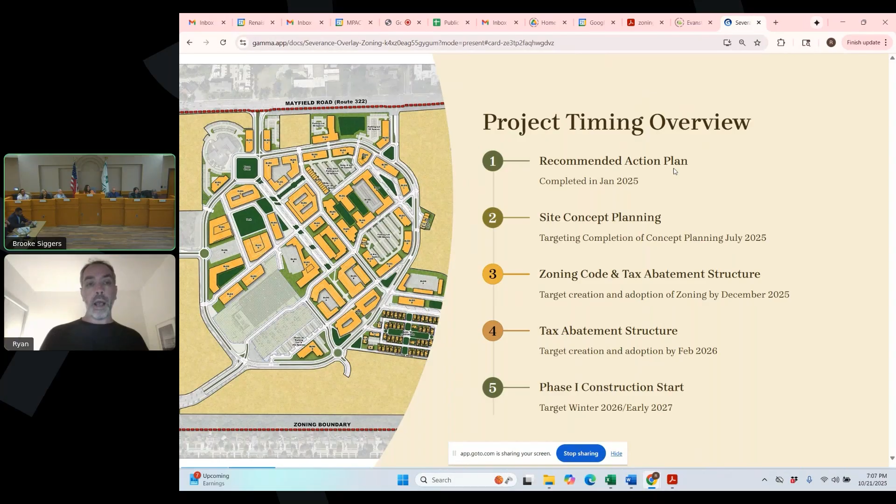So I'm going to roll through where we are. Again, the area concept plan, some of you may or may not have seen this. It hasn't changed dramatically since I presented it to the city council. This is a large scale mixed use walkable development. This concept plan was strategically developed by us, but I want to be 100% clear: we're not saying this is exactly what's going to be built.

The zoning code we're recommending for the city to adopt for this site is an optional overlay form-based zoning code. It will sit on top of the S1 zoning that exists on this site and will not be an obligation for any property owners to use. They could stick with their S1 zoning, or they can opt into this new code. It's optional — really important for people to understand. We're not forcing the zoning on every property within this red boundary.

That red boundary is bordered on the north side by Mayfield, on the west by Taylor, on the south by the back lot lines with some buffer to the single family home neighborhoods, and same on the east. It'll have a buffer area to the single family home neighborhood on the eastern side. That will be the overall zoning boundary.

Again, this will be an optional zoning that people can opt into or stick with their existing S1 zoning. Ultimately, this form-based zoning code will allow people to develop certain uses under certain zoning and form regulations — different heights, different standards for frontage requirements, whether they have ground floor commercial space or not. That will be regulated on a block by block basis, and I'll get into that as we go through this presentation.

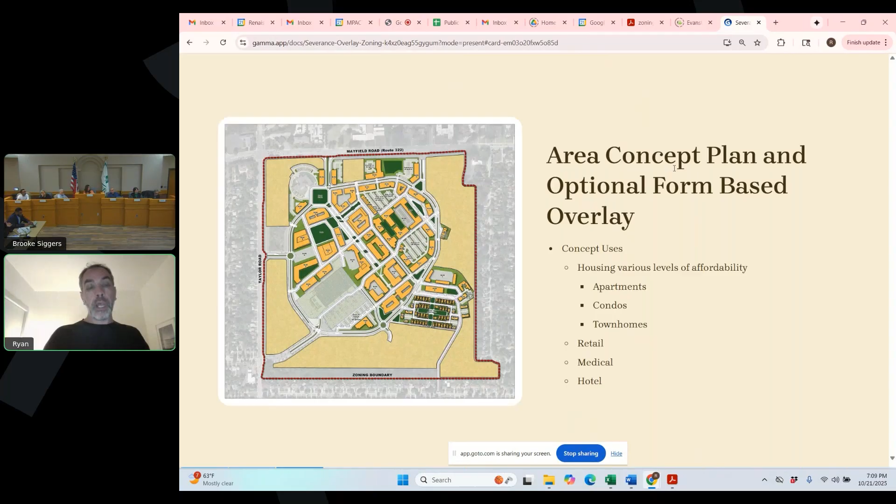Just because I have the buildings set out the way they are right now — we imagine phase 1A to be this right-hand side of your screen, the corner up near the existing condo building adjacent to City Hall. We imagine that being the first mover area of this project. But because we've designed the concept plan as building A, B, C, D, E, how they're laid out, we're not saying that's exactly what's going to be built.

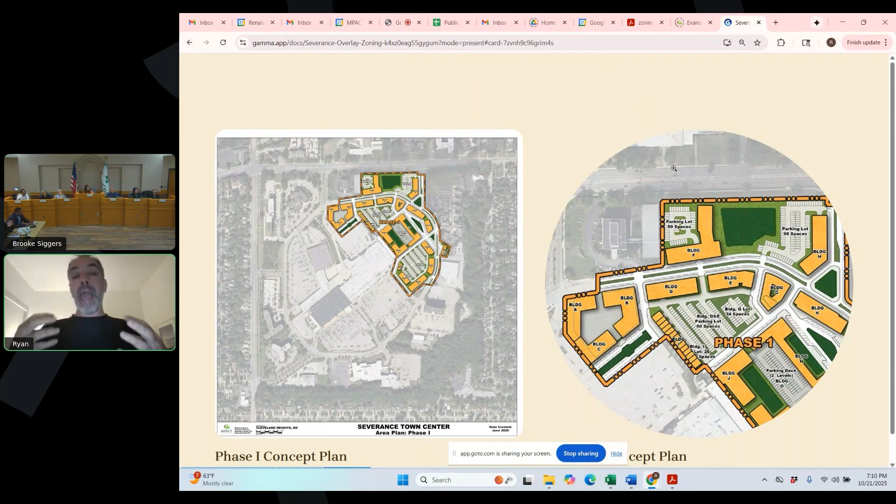Ultimately, the building will go through a site plan approval process and an architectural design process, but the rules around each block need to be followed as the form-based code calls for. Building A, B, and C might become a donut building instead of 3 separate buildings, or it might become 2 bar buildings along the 2 streets.

So the concept plan is not directly required, obviously, because I can't guarantee how things will be built, but the rules around the urbanity and walkability we're designing into the form-based code will force buildings to be set up at the street with parking hidden behind, certain heights allowed, certain typologies, and a certain amount of open space, civic space, and parking required. We'll dive into those types of things.

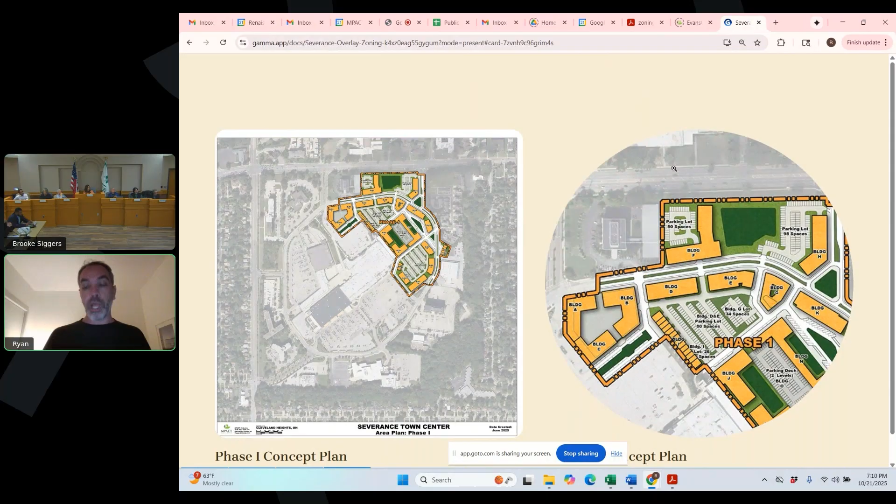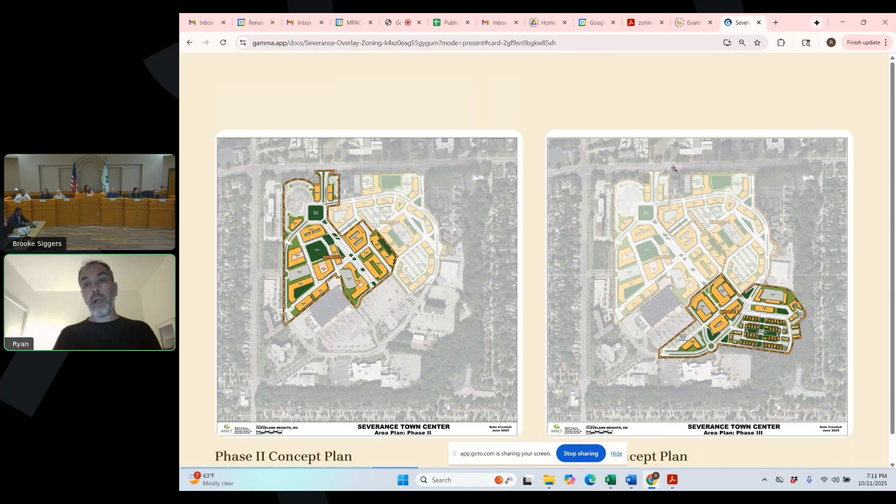This concept plan is a driver for how we could see the site getting developed over time. Eventually we think we'll develop basically the entire east portion of the site from the north side to the south side where the Walmart movie theater box is, because that's the least occupied area of the mall and the most available for development from a parking lot vacancy perspective. Then we imagine moving back up towards City Hall for a second large phase of this project.

To be clear, phase one alone, as programmed in this concept plan, could be 7 to 10 years of development alone, because that in and of itself is 700 to 800 units in just that area. Remember, this is a very large site. What I was showing you in phase 1A is like half the size of Van Aken, just that little section, because this is a 50 plus acre site. So it is going to take a long time. This could be a 20 to 25 year build out, and it's definitely going to be a process.

But again, we see transitioning from a large phase one on the eastern corridor of the overall site to then tearing down most of the main mall areas, hopefully moving the Daves into a new facility, and then building this kind of boulevard type Main Street area that starts at City Hall. That would be the phase two area, and then we'd work our way towards the southeastern portion of the site for what we consider maybe a phase three area.

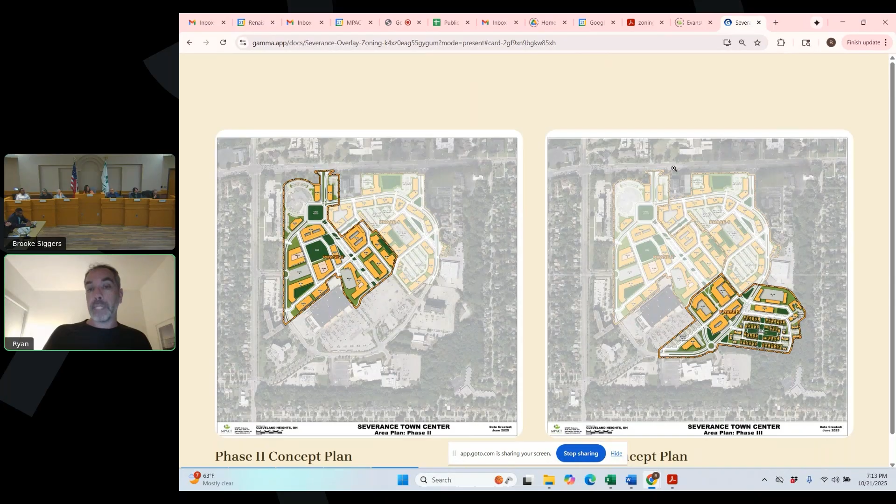You'll notice that Home Depot is kind of sitting out there all on its own because we don't control that parcel, and it's very unlikely that parcel changes over any near term. That said, the zoning overlay will sit on top of that Home Depot site. So should the value of this downtown become such that it makes sense financially for Home Depot to no longer be Home Depot, then the owner of that site has the opportunity to opt into the zoning as well.

I'm going to talk a little bit about form-based zoning, but we don't have enough time for me to get into the nitty-gritty. It is something that was built to oppose the traditional Euclidean zoning that we used for a very long time, and I'm sure Bob and some of the people on your commission could even explain it better than me. As opposed to having uses that are segregated into areas, here's a residential area, here's an industrial area, here's a commercial office area,

form-based zoning looks at putting those uses together and regulating the form of the buildings and the public space around them. So how do we create great place? Through our form-based zoning codes, which we've done very successfully in multiple communities, we create great place by regulating how the buildings address the curb and the public space, what has to be civic space, how high the building can go, what the step backs are over a certain height, and where the parking has to be hidden. Those are all the things we regulate in the form-based zoning code.

How much ground floor glazing do you have to have versus just having a blank wall? How much of that ground floor glazing has to actually be retail space? And we regulate different blocks that we see as more commercial and mixed use versus more residential, walkable blocks that are less mixed use in nature. So we regulate each one of these blocks with our form-based zoning code to allow for the types of development that create these great walkable places.

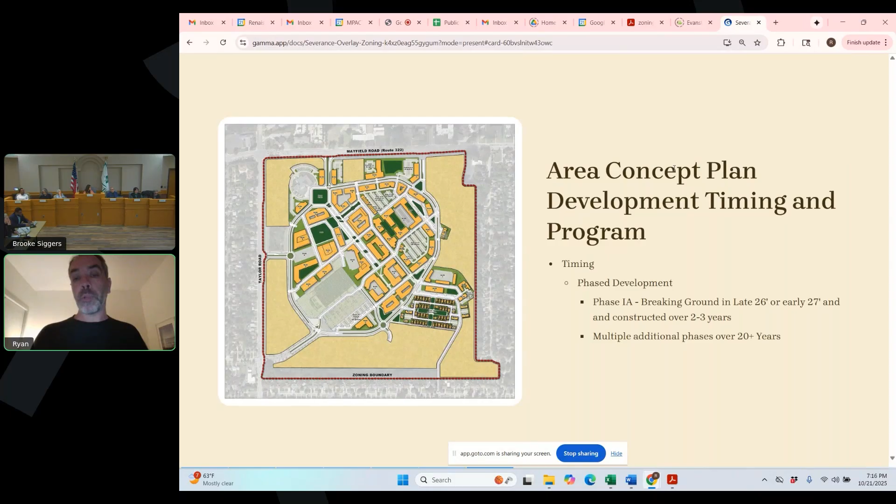So again, we are looking to break ground kind of late '26, early '27. The first phase alone will probably be a 2 to 3 year build out. I'm thinking that's going to be in the range of 200 to 300 units in multiple buildings and configurations, with somewhere in the range of 5 to 15,000 square feet of ground floor commercial and retail space as part of that. Those are my conceptual plan numbers right now, but again, the concept plan is not necessarily directly connected to the code itself.

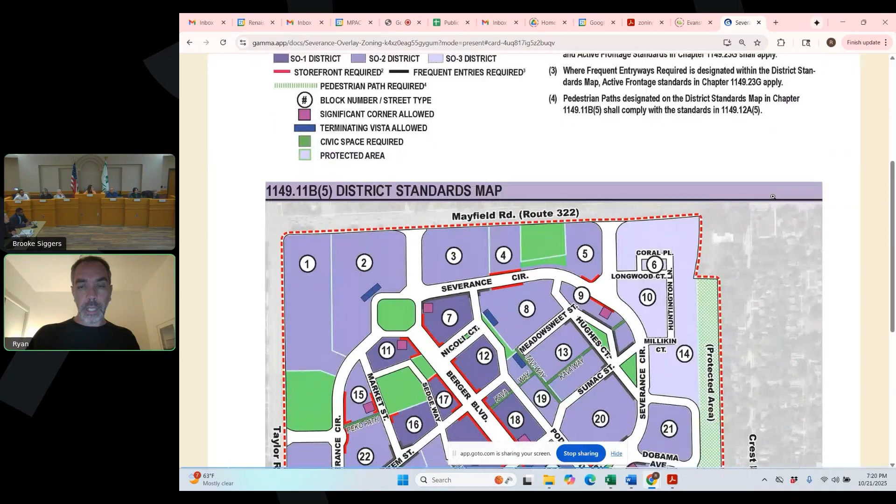I'm going to go to the next slide, and I will stop and come back to anything if people want me after, but I just want to get through some stuff with you. All right, this is not showing up exactly how I wanted it to - okay, so this is really important.

This is our regulating plan. So if you can see this map, this is what I was talking about as far as blocks go. You can see all these numbers - 1, 2, starting in the upper left-hand corner, 1, 2, 3, 4, 5, and so on and so forth.

Those are our regulated blocks. So for our zoning code, we are imagining the street network to be this street network. So we've designed this street network.

The reason we designed the street network like this is because we actually took a lot of the right-of-ways and where the internal road networks exist in the mall, and we tried to augment them as little as possible to turn them into a more walkable, pedestrian-oriented street grid, because there's a lot of infrastructure under those areas, right? So this project's going to be very infrastructure heavy, expensive, and infrastructure is always a really expensive thing. Moving roads, moving sewer, moving water, moving curbs, moving drainage.

But we were able to kind of manipulate this such that we can have larger, more boulevardy streets and more neighborhood streets and pedestrian ways that fit into the existing topography and infrastructure setup of the Severance Mall site over time, so that it fits a downtown development, right? But it's also taking advantage of the existing infrastructure.

So there was a lot of work put into studying all that to get us to this place where we've set up these development blocks, right? And like I said, each one of these development blocks will have certain rules to the block, right?

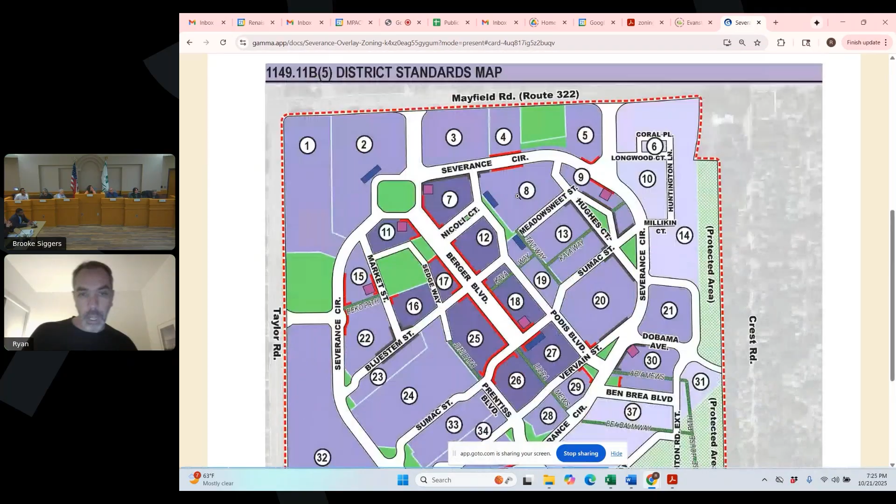Street networks, there's certain green space areas that are pre-programmed. There's pedestrian ways that you see those greenways. Every street has a different typology. Every block has different rules around it, as I said. So again, this is our regulating plan. All right, let me get to the next slide.

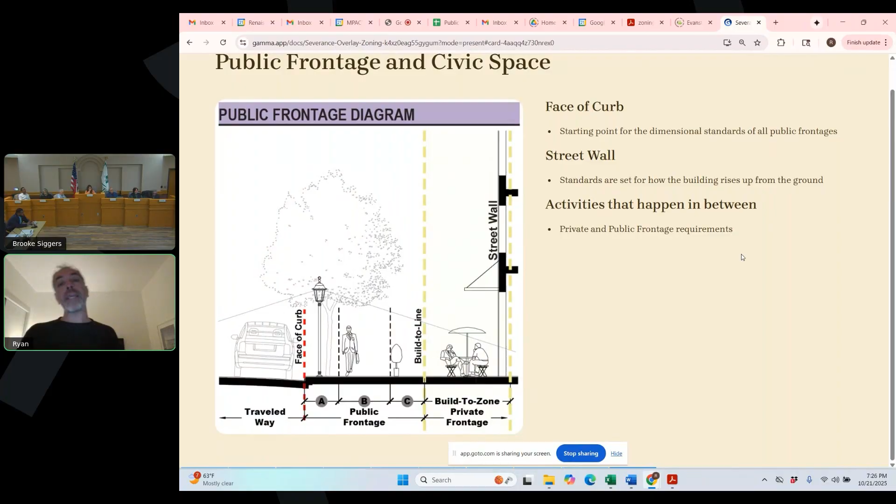Public frontages are a huge piece of our code. We regulate from the face of the curb to the street wall of the building what has to happen - the furnishing zone, the clearway zone for pedestrians to walk, and the private frontage zone where you could have outdoor dining or whatnot. All our blocks, streets, and frontages are purposefully regulated depending on the place. You might be in a more residential area with a porch condition, so you don't have to have the same commercial frontage as on a main street. This is just an example of a public frontage diagram.

Parks and open space are super important. Our concept plan had about 5 acres plus of parks, and more once Berger Boulevard could shut down on weekends once the main street is built. Around 5 acres we pre-programmed as frequent public civic spaces. We think it's really important that they be programmed, not just blank spaces that sit there and create dangerous dark areas - they have to be programmed civic spaces.

The way we regulate this in the code is that we require every site from 15,000 to 100,000 square feet to provide 10% of their site area as civic open space. But they have a buyout option, up to 50% of that requirement, and that buyout comes at $35 a foot, with that money funneled into a fund that the city, and hopefully the NCA we're going to create for the site, will control to fund larger public spaces.

So there's a minimum each developer has to do, and then they can buy out half of it, but they still have to build half. The buyout money, if they buy out, goes into a larger fund to help fund larger civic spaces. This is something we've done in a lot of places, and it's worked really well for us.

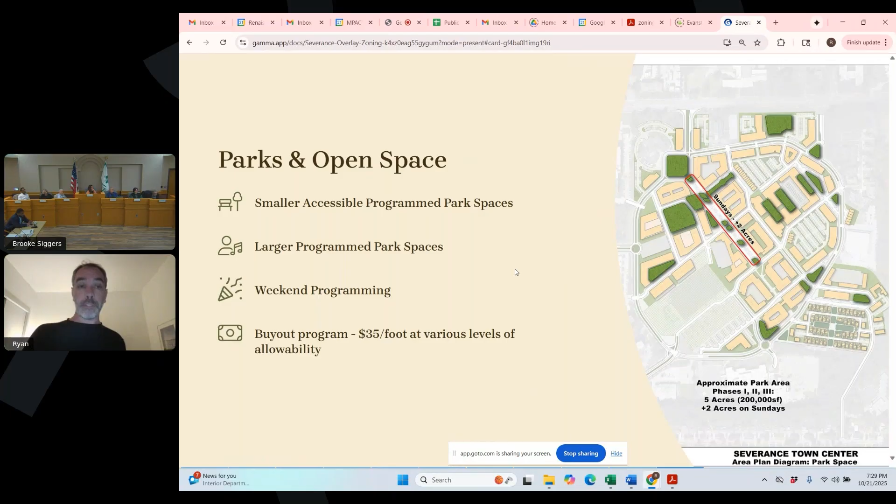So a 100,000 square foot site would be required to provide 10,000 square feet of civic space on site, but could buy out at half - providing a 5,000 square foot beautiful plaza or civic space, and then 5,000 times $35 a foot in funds that go into our civic space fund. Okay, that's civic spaces.

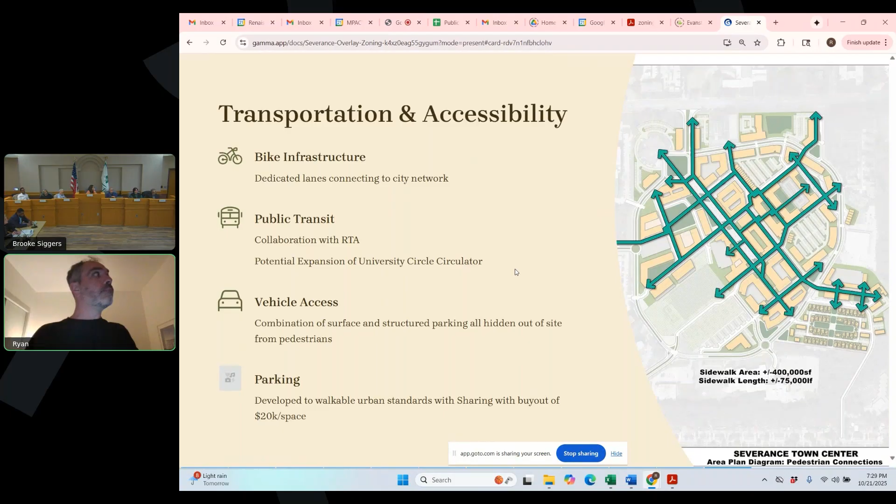Transportation and accessibility - I'll skip forward to parking. We have different parking standards for all the uses, going with walkable urban parking standards, like 1 space per residential unit, with sharing allowed. We're trying to be pretty aggressive with the parking requirements. A lot of the parking will be hidden surface and interior of the blocks in the beginning, then eventually we'll move to structured parking. But we do allow for parking buyout at $20,000 per space, and that money can go into a fund that helps fund public parking garages over time.

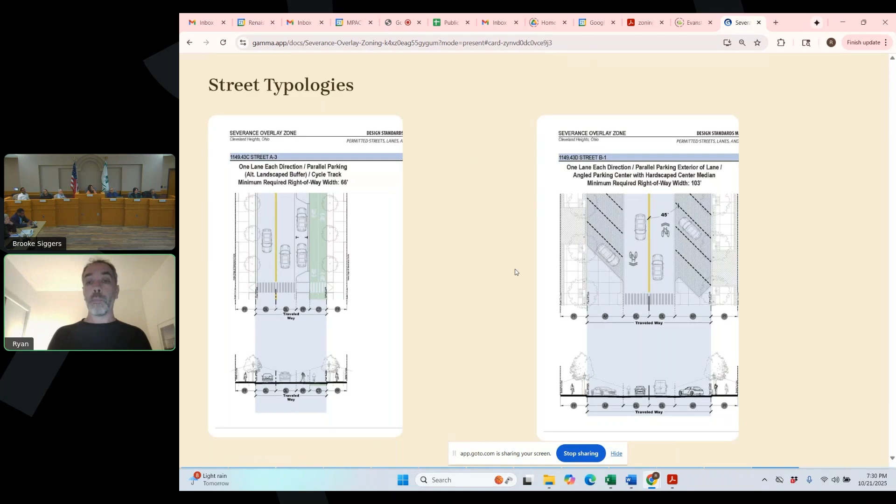So we have all these different street typologies that we designate for each street. We spent a lot of time with your transportation committee and their chair changing these street typologies based on their comments, to come to where we are today, which we find are going to be really great, walkable, vibrant, but still move traffic streets.

All right, so I want to talk about the as-of-right approval process and timeline. I want to be 100% clear about this: the purpose of this type of zoning and our process is to create a highly investable environment. What helps create that is setting these things up as as-of-right conditions.

We don't believe people should be able to come in here and ask for a variance on our code. It's not prohibited, but we're pushing against that, because in theory they could use the S1 zoning and ask for a variance under it. But since you're opting into our overlay zoning, you should follow the rules of that road.

With that process, and tying in the tax abatement work I'm doing, we're trying to create this highly investable environment—because if people had wanted to build on Severance and it was easy to get done, it would have happened already. So we create this really expedited as-of-right approval process connected to our code, following it for this approach.

We've set up a process with Eric and Karen and the team that we think will attract that, very similar to places we've worked elsewhere. The process proposed is that there's a technical advisory committee, made up of boards and heads of staff, led by the zoning administrator, currently Eric. That TAC gets the first look at someone's proposed project.